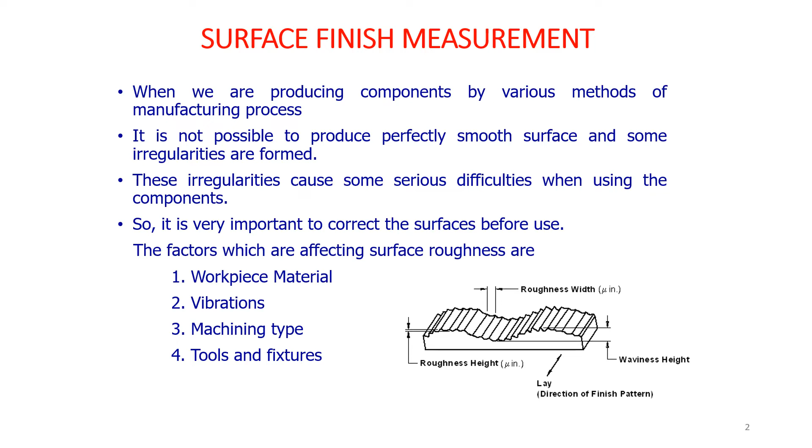Okay, how are we going to measure the surface finish? There are four instruments used for measuring surface roughness, surface finish. They are termed the direct instrument method. The first one is a stylus probe instrument. The second one is a profilometer. The third one is the Tomlinson surface meter. The fourth one is the Taylor-Hobson Talysurf instrument. These are the four surface finish measuring instruments.

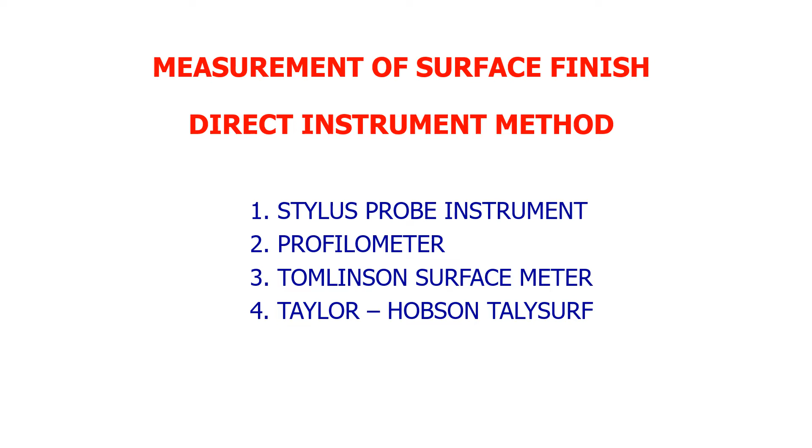The stylus probe type of instrument is a very simple instrument. The stylus is nothing but a vertical rod having a diamond-shaped spherical point at the tip. The skid is a holding device which will move over the surface. The stylus will follow it. This will be connected to the recorder, and the wave structures, that is the ups and downs, will be recorded, magnified, converted into digital, and finally we will get the reading.

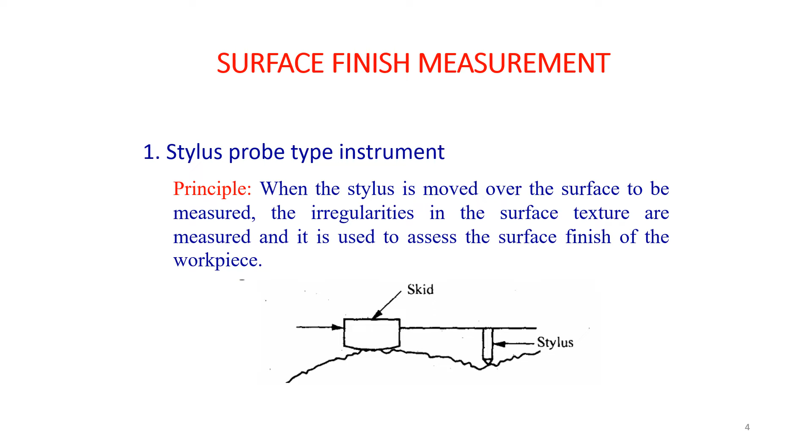The irregularities in the surface texture are measured in order to assess the surface finish of the workpiece. This is a very simplified method. How it works: it consists of a skid, a stylus, an amplifying device and a recording device. The skid, as I have mentioned, will slowly move over the surface by motor or hand. The skid follows irregularities of the surface as the stylus moves along with the skid. When the stylus moves vertically up and down, the movements are magnified, amplified and recorded to get a trace.

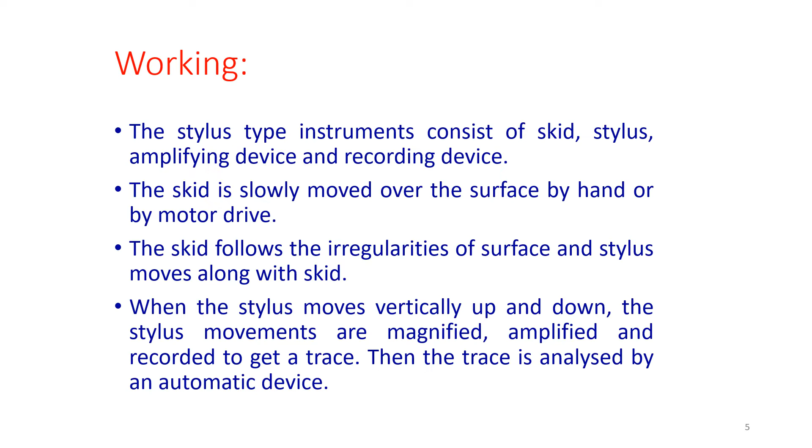Then the trace is analyzed by an automatic device, which is very similar to our ECG graph. In the ECG graph also we get ups and downs of sinusoidal waves. A very similar recording will be carried out for each instrument, and those readings will be analyzed by an automatic device or by the experts working in this field.

The advantage of this type of instrument is any desired roughness parameter can be recorded. For glass or fragile material, we can't use this type of surface finish measuring instrument. The initial cost is high. It requires skilled operators. So this is about the stylus probe instrument.

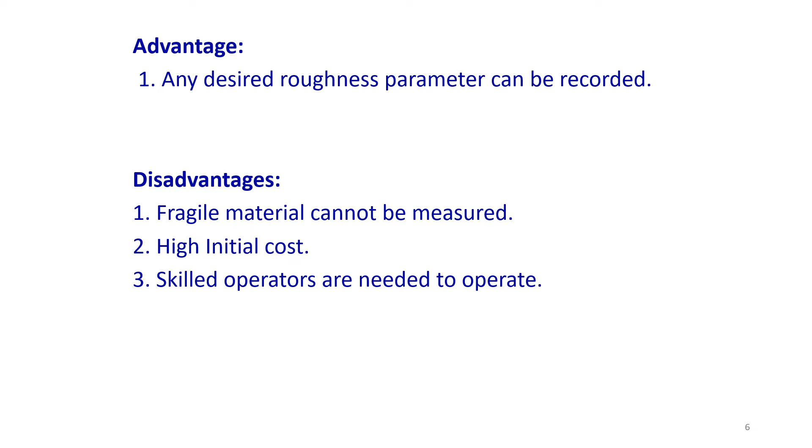The second type of measuring tool is the Tomlinson surface meter. If you look at this diagram, it is very simple but looks like a complicated one. See here, this is called the vertical motion of the stylus. In the previous one we have seen a very simple probe-structured stylus. Here we are seeing this vertical rod. Here we have the diamond probe, that is a diamond stylus.

This odd shape is called a skid. Over this it will move. This is the workpiece which we are going to measure. This is the fixed roller. Likewise, this part of the diagram is amplified and redrawn here. This is called the stylus. This vertical rod is shown here as a circle. This one is a lapped steel cylinder.

The circle is shown here as a vertical cylinder, the lapped steel cylinder. These are the two fixed rollers. Here it is connected by means of an arm with the diamond stylus. Here it is a smoked glass. Over this we are going to draw the waves. This is the construction. If you look at this, the vertical motion of the stylus is held by means of a coil spring as well as a leaf spring.

This is a leaf spring. This is a coil spring. These two springs are used to hold the vertical motion of the stylus. This is the horizontal motion of the body. When it moves, the diamond probe or stylus moves over the surface, and this will be recorded. For that we need a horizontal motion of the body. So here we will be getting the wave that will be recorded and it will be analyzed.

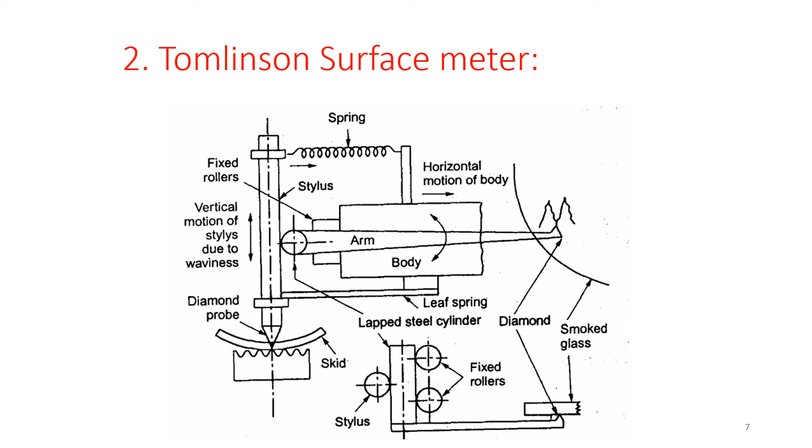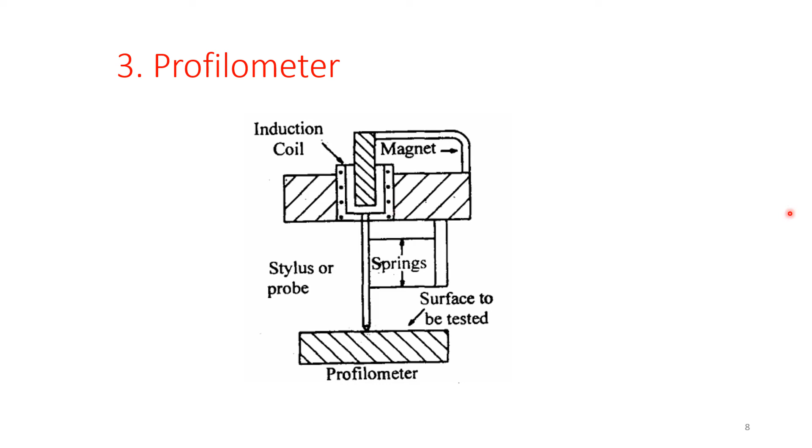The third type is the profilometer. This is very similar to the first one we have seen, the stylus, and here the profilometer, that is the surface to be tested. Here is the induction coil. The minute movement will cause AC current to be generated. Since an electromagnetic field is generated, it will be converted from analog to digital and we will be getting the readings. That is the profilometer.